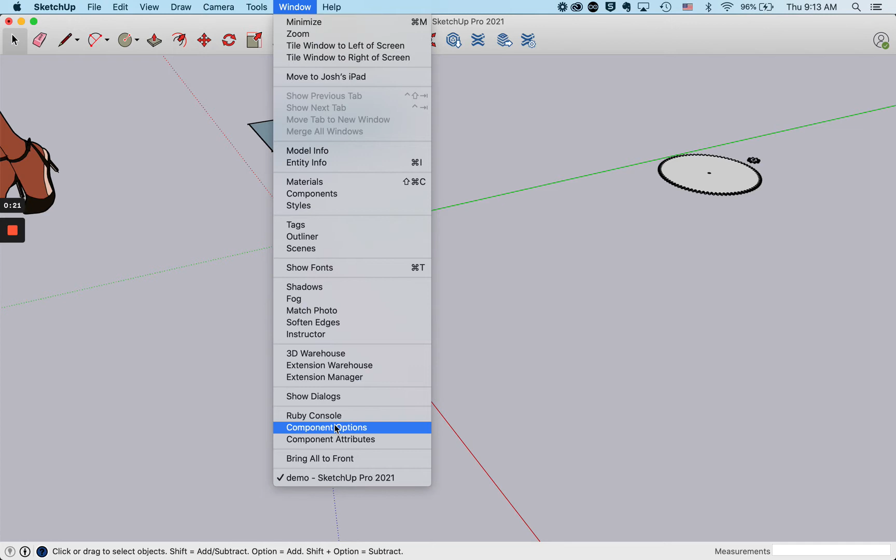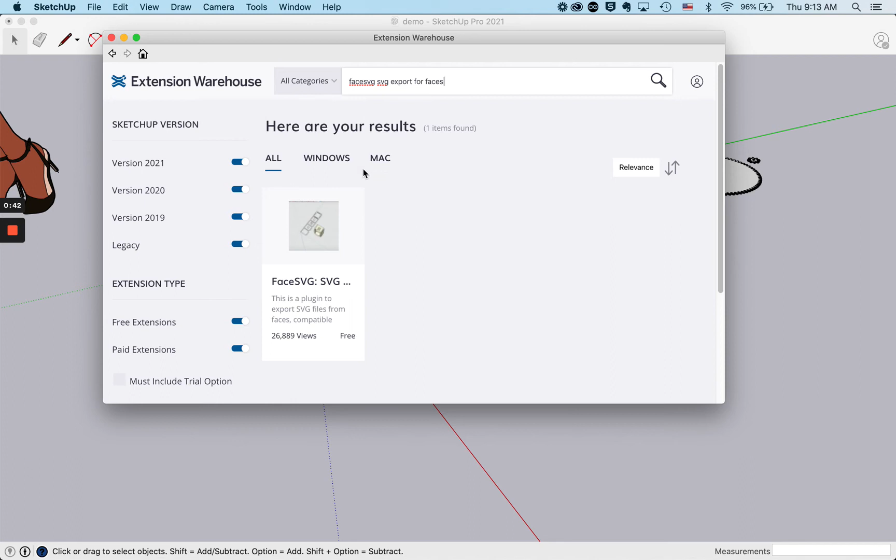So here in SketchUp you're going to need an extension called... extension warehouse, and search for, I forget what it's called exactly, Face 3D, Face SVG. Oops. Face SVG. There it is, Face SVG export for faces. Download and install that. Now in your SketchUp document, if you right click on something, the Face SVG menu pops up.

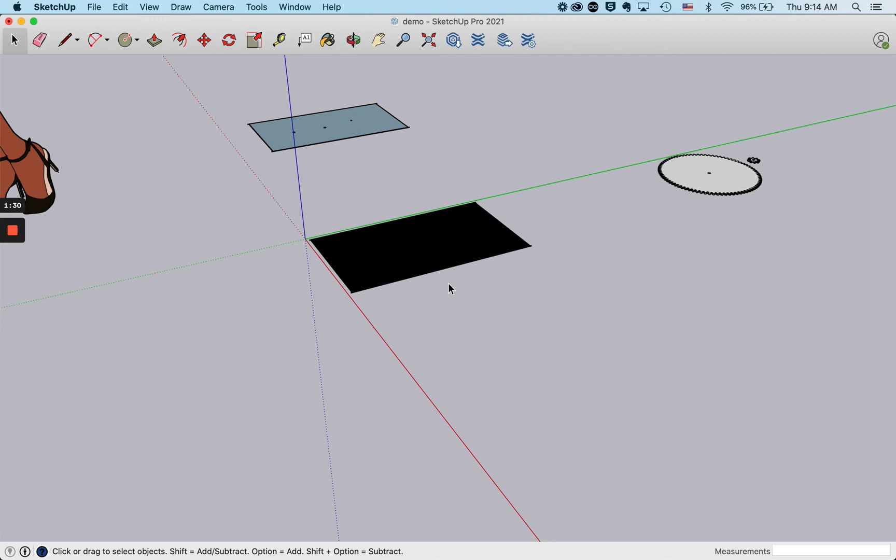So, okay. I've got 3 items that I want to export to SVG so I can cut them on a CNC machine. I want to move them away from the origin because this is where the faces are going to go. Now the trick is to only select the face of the piece you want to convert to SVG. If I select the edges as well, it's not going to work. So I just get the face, right click, Face SVG, Layout SVG profile. It makes this black square which matches the face of this right at the origin.

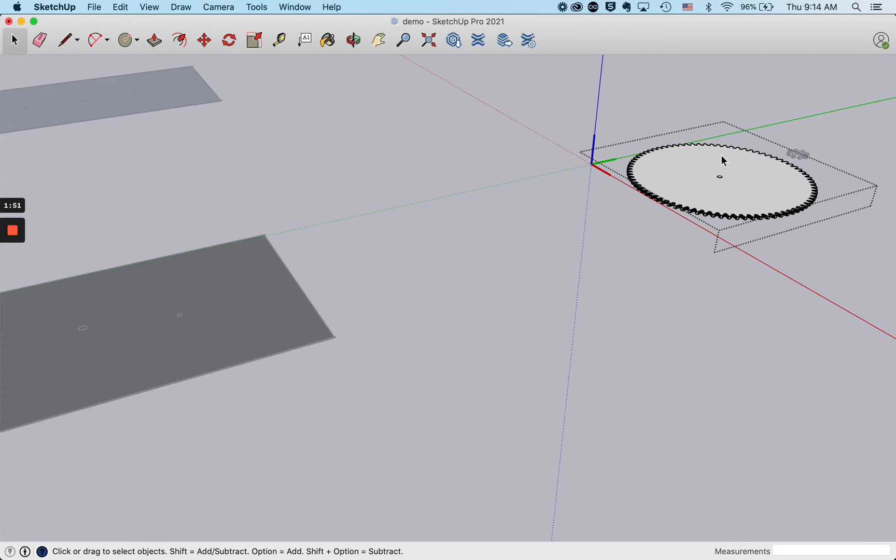On a component, it's a little different. You have to click into the component and get just the face. Now here I've got the face and the edges. That's no good, so I'm going to click outside the object but within the component and go back and just get the face. And I'm going to lay out the profile. If you hit reset layout, you have to start all over again, so be careful.

It came back. All right, we'll just edit that out.

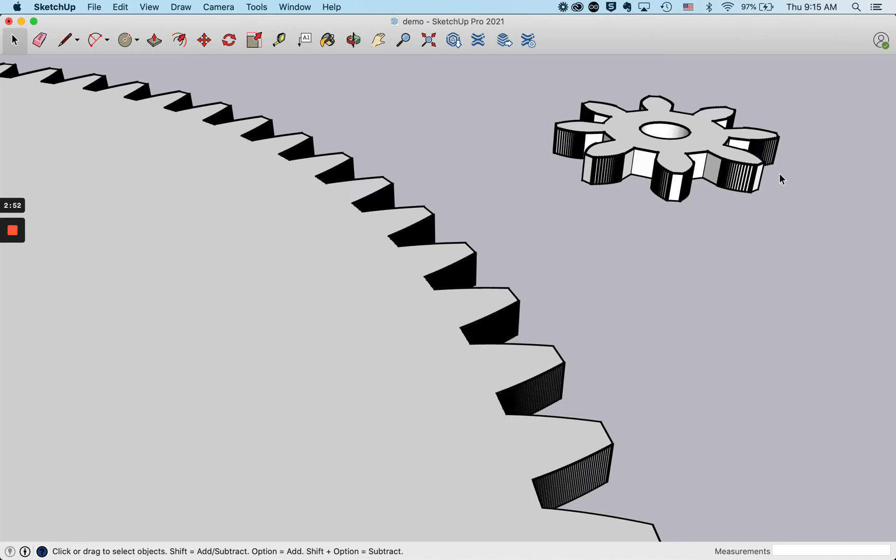All right, let me do the last little piece. Got to zoom into it so I can get just the face. There's the component. Now I've got the edges too, so I click outside and then click just back on the face. Yeah, beautiful. All right. Face SVG, Layout SVG profile.

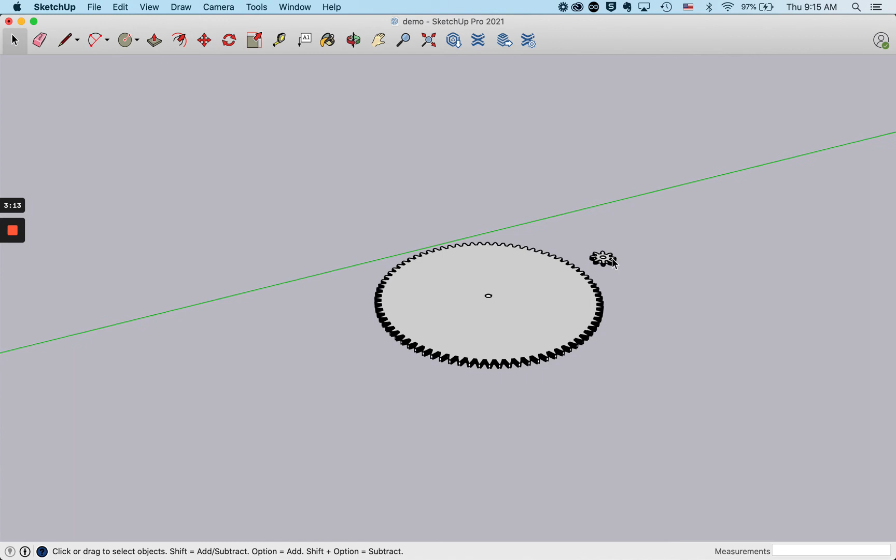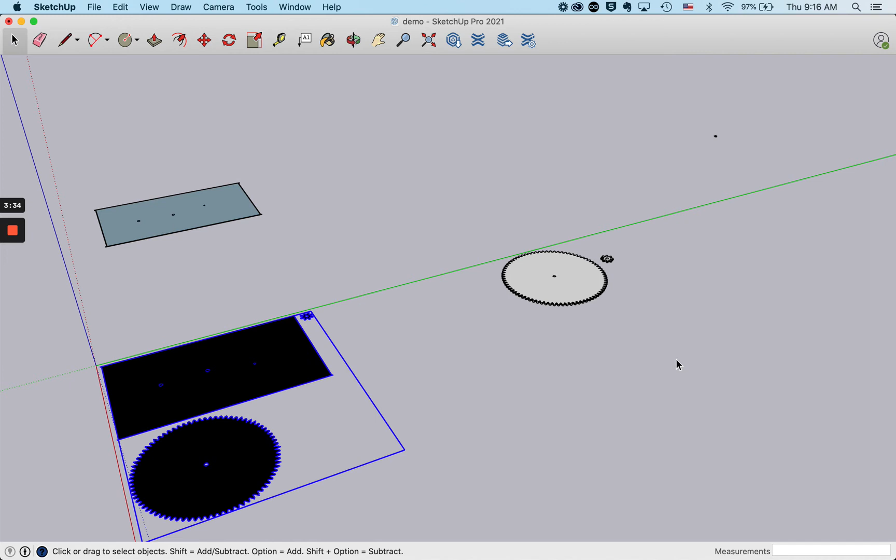All right, now if I go to the origin, I've got these beautiful objects. I just click on one of them, or click on all of them. Right click, Face SVG, and Write SVG profile. This is going to save an SVG file of just those black items. So here we're calling it Demo SVG. Terrific. Okay, now if you don't have Illustrator, you're done.

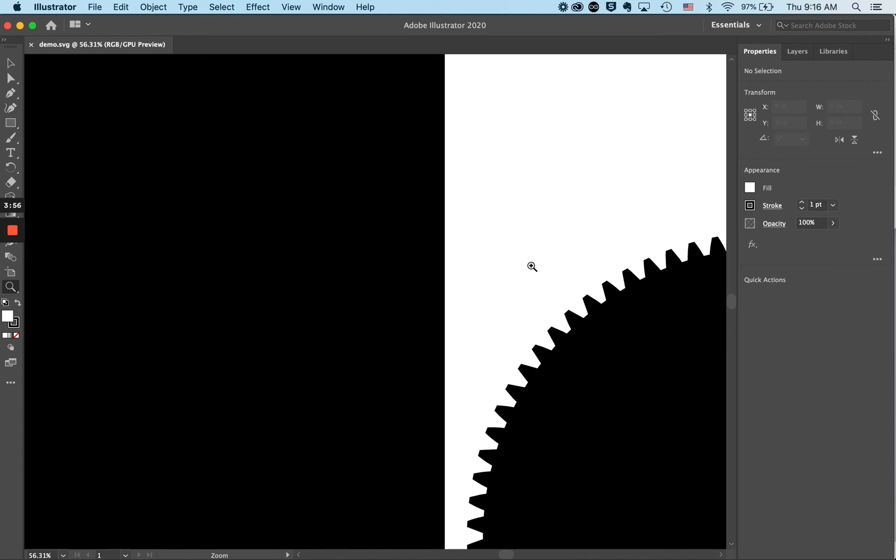If you have Illustrator, then open it in Illustrator. Okay, so it's not going to look right when you open it in Illustrator initially. Let's see what we got here. It's pretty close. First you have to set the stroke and the fill.

So select all, set your fill to nothing. That's the red diagonal line. Set stroke to black. If black doesn't show up, if it opens like this, you have to hit this little palette thing. You can get black.

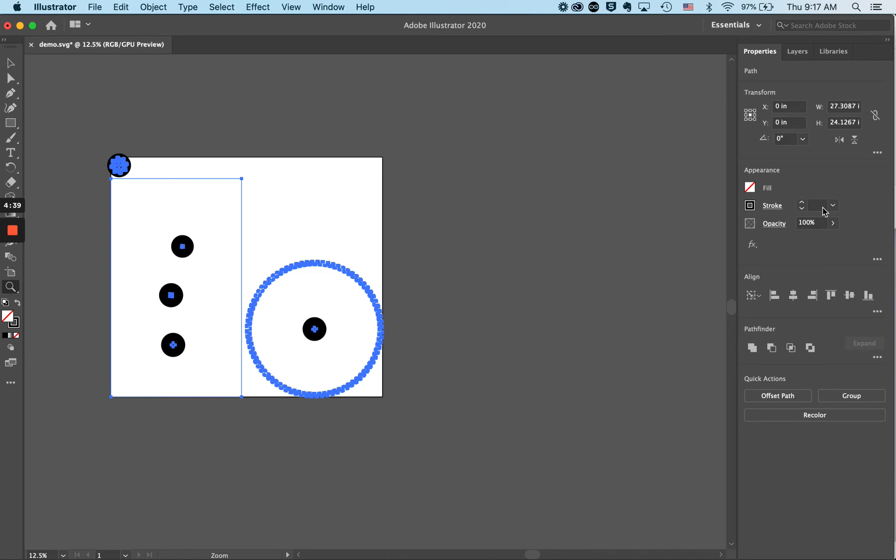And very importantly, the stroke weight comes in really fat for some reason on some of the shapes. So set the stroke to, in our case, for our laser cutter, 1/1000 of an inch. Okay, so now we've got laser cuttable pieces in Illustrator.

The last thing to do for our laser cutter, which has a 32 by 20 bed, is to edit the artboards. File, Document Setup, and edit artboards, and change the width to 32 inches and the height to 20. And then exit.

Now you just have to move things around so they fit together on the board, and save it as an SVG or an AI, and you're ready to laser cut or use other CNC machines.